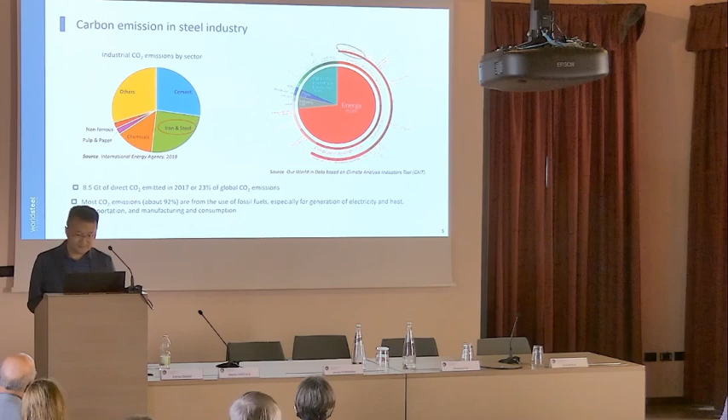And also embedded global carbon emissions from the steel industry. More than 1/3 of global carbon emissions related to steel production are reflected in international trade, and many developed countries are net importers of steel carbon emissions.

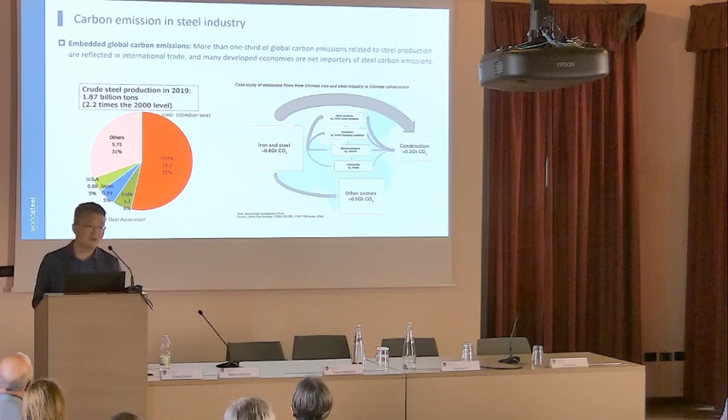Just a brief introduction to the iron and steel making process. There are 3 main routes for steel production. The first is primary steel production, mainly by blast furnace and BOF process. About 72% of steel is produced by this process. Second is DRI EAF, direct reduction iron and EAF. The third route is secondary steel production, mainly by scrap steel and EAF.

In the steel production process, coal can be used in 2 ways: first as a power source, and second as raw material. For different steel production processes, the CO2 emission intensity is different. According to different institutes, the average CO2 emission intensity for the traditional steel production process is about 2.2 tons CO2 per ton crude steel.

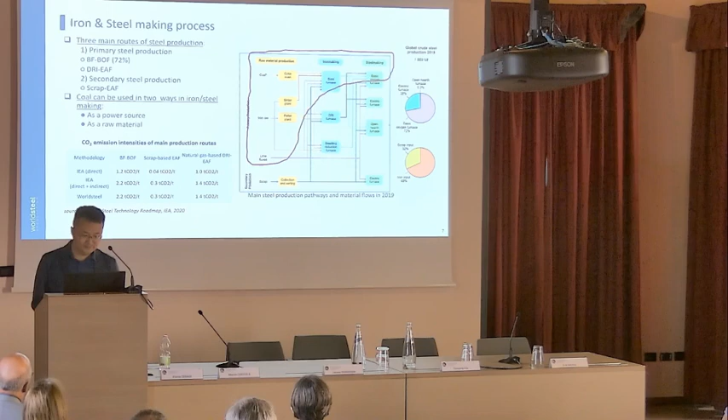These are the 3 main routes of steel production, and this is the CO2 emission from typical steel production. For different processes in steel production, the CO2 emission is different. This is the traditional long steel production process. The total CO2 emission is about 2.15, but for different companies, this data may be different.

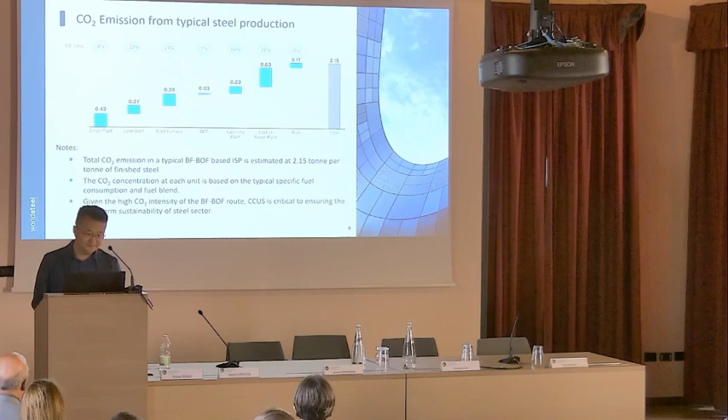Next, we'll talk about CCUS. You all know about CCUS, but CCUS actually includes CCS or CCU. What should we choose, CCS or CCU? In this conference, we mainly talk about CCS. But in China, we are now doing CCUS work, and CCU is more talked about by steel companies and experts in universities. Compared with CCS, CCU mainly talks about how to transform CO2 into other products, such as methanol, alcohol and other chemicals.

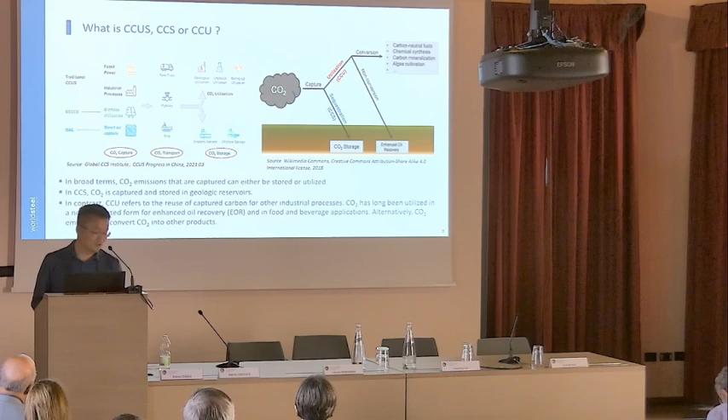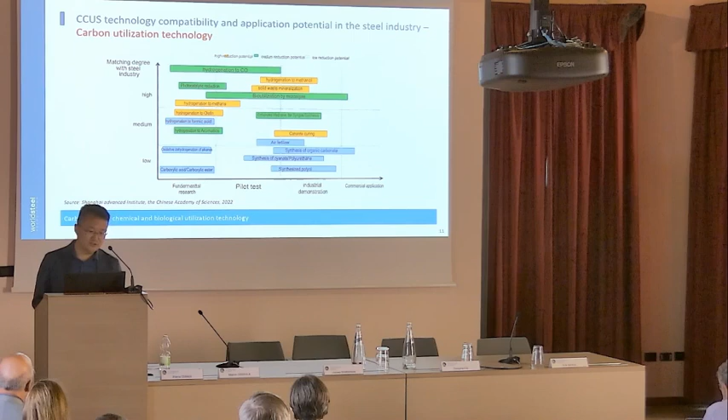This graph shows carbon dioxide chemical and biological utilization technology, which we call CCU utilization technology. Different colors also represent different CO2 reduction potentials. Green has the highest potential, followed by blue, and yellow with the lowest potential.

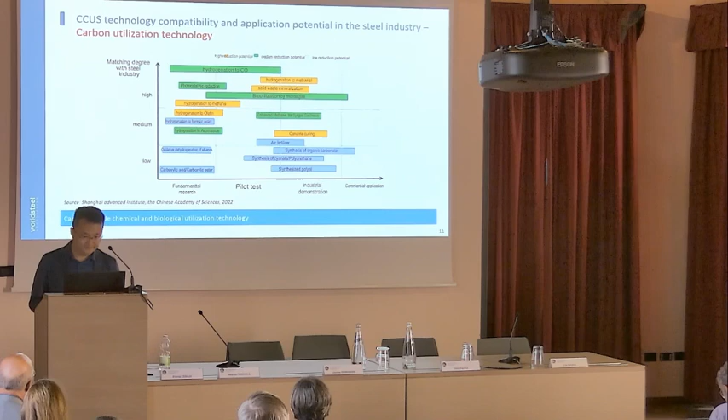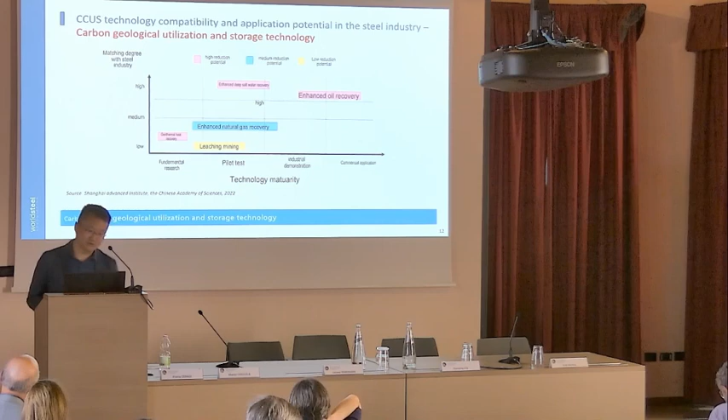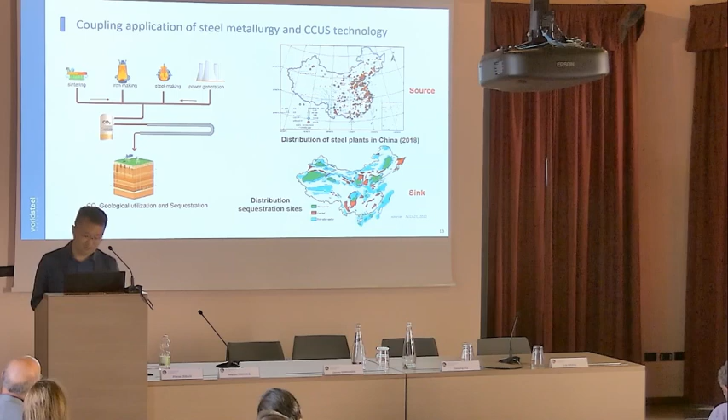And I want to say in the past few years, we often talk about CO2 emission reduction, so from the emission reduction perspective. But now we should reposition CCUS technology from a carbon neutral perspective. CCUS should play a key role in future industrial decarbonization, especially for energy structure.

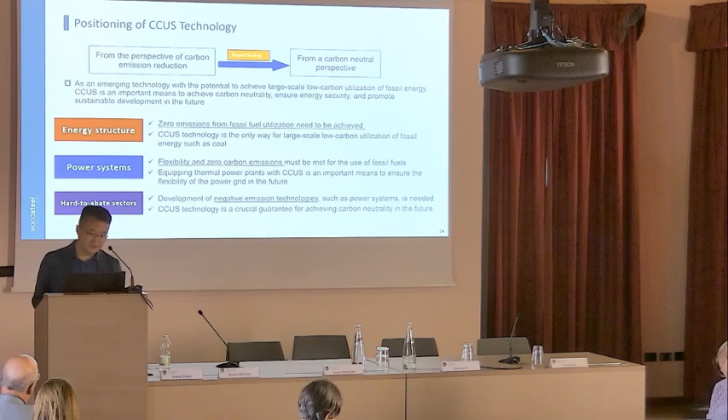CCUS technology is the only way for large-scale low-carbon utilization of fossil energy, such as coal power plants. And for the power system, flexibility and zero carbon emissions must be met for the use of fossil fuels. Equipping thermal power plants with CCUS is an important way to ensure flexibility for the power grid in the future. And for hard-to-abate sectors such as steel, development of negative emission technologies is needed. CCUS technology is a crucial guarantee for achieving carbon neutrality in the future.

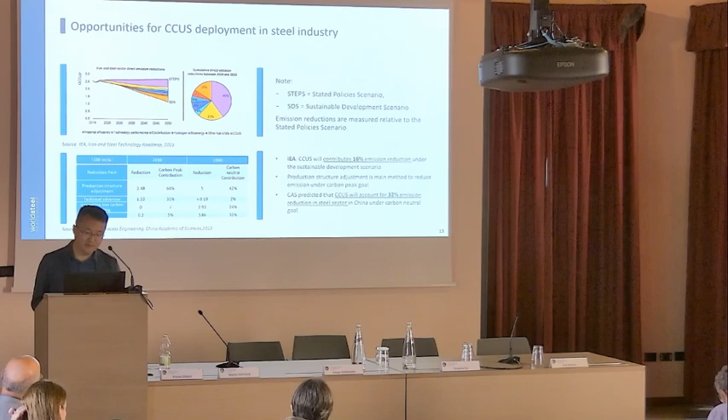And this chart shows, from 2020 to 2050, the CO2 reduction by different paths in the steel sector. Before 2030, the main decarbonization ways should be material efficiency improvement and technology performance improvement. But after 2030, till 2050, CCUS will play a more and more important role in steel decarbonization. From the IEA, CCUS will contribute about 16% emission reduction in the sustainable development scenario. And according to the CAS prediction, CCUS will account for about 32%. So this is different.

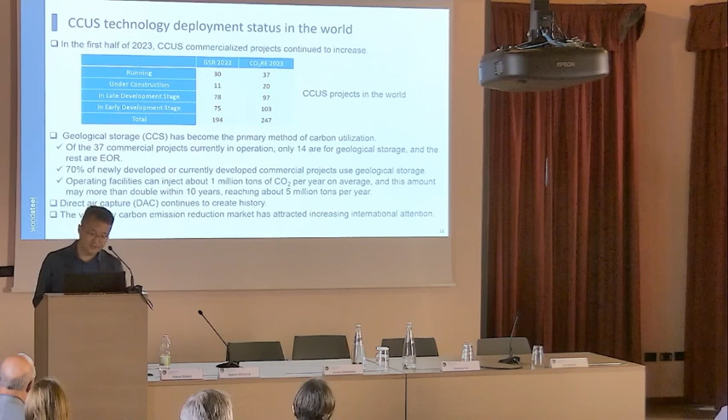And this will introduce the CCUS technology deployment status in the world. In the first half of 2023, CCUS commercialized projects continued to increase. From this table, geological storage has become the primary method of carbon utilization. In the past, it was mainly for EOR or EGR, but in the future geological storage becomes the primary method. And 70% of newly developed commercial projects use geological storage. DAC continues to create history. And the voluntary carbon emission reduction market has attracted increasing international attention.

And a brief introduction to CCUS deployment in China's steel industry. In 2018, Chinese Shougang Steel built the world's first steel tail gas biological fermentation industrial device and put it into operation. This is similar to the ArcelorMittal Ghent plant using blast furnace gas to produce methanol and alcohols. In June 2022, China's steel industry's first full-chain CCUS demonstration project began construction. The scale is 2 million tons per year, and the first phase is about 500 K tons. And in November 2022, China Baowu signed an MOU with Shell, Sinopec, and BASF to launch an open-ended 10 million ton CCUS project.

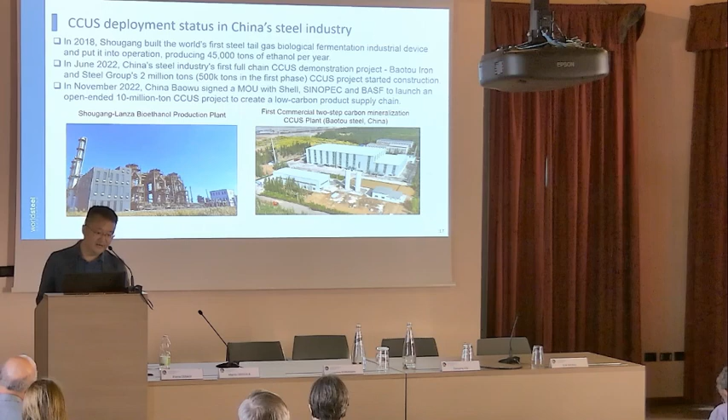And a brief summary of the CCUS deployment challenges: first is high cost, second is high energy consumption, and the third is high security risk. Here I want to talk about the public perception of CCUS safety, because CO2 storage relates to high pressure treatment of CO2, long distance transportation, and underground storage. So the public is mainly concerned about safety problems, such as CO2 leakage, pipeline rupture and earthquakes, which may have serious impacts on human health and the ecological environment. And the fourth is lack of policies and regulations. I think these are common problems in China and also other countries.

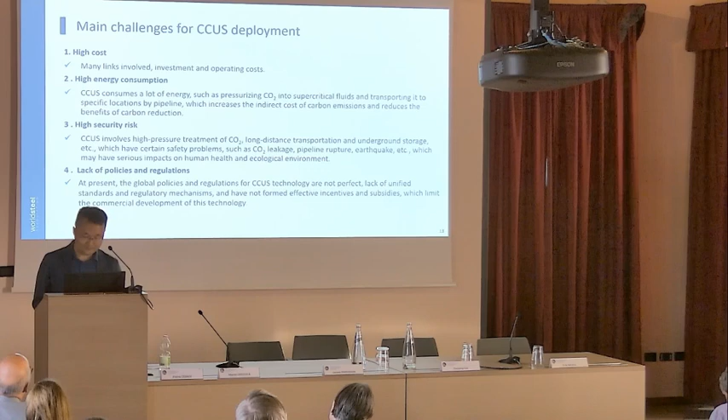Lastly, I want to give a brief summary and outlook. CCUS is the main technical means to achieve large-scale zero-emission utilization of fossil energy and maintain power energy flexibility. So CCUS is a necessary solution for hard-to-abate sectors such as steel, non-ferrous metals, chemicals, and cement. CCUS technology has made great progress in the past years and is increasingly deployed globally. The deployment of CCUS will face many challenges such as technology, security, cost, and policy.

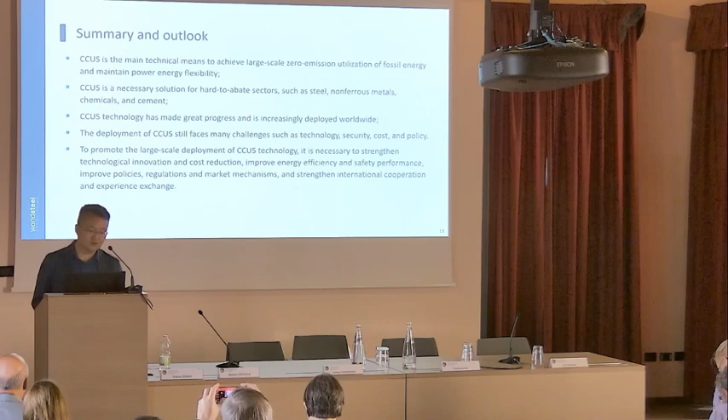So if we want to promote the large-scale deployment of CCUS technology, it is necessary to strengthen technological innovation and cost reduction, improve energy efficiency and safety performance, improve policies, regulations, and market mechanisms, and strengthen international cooperation and experience exchange. Thank you.